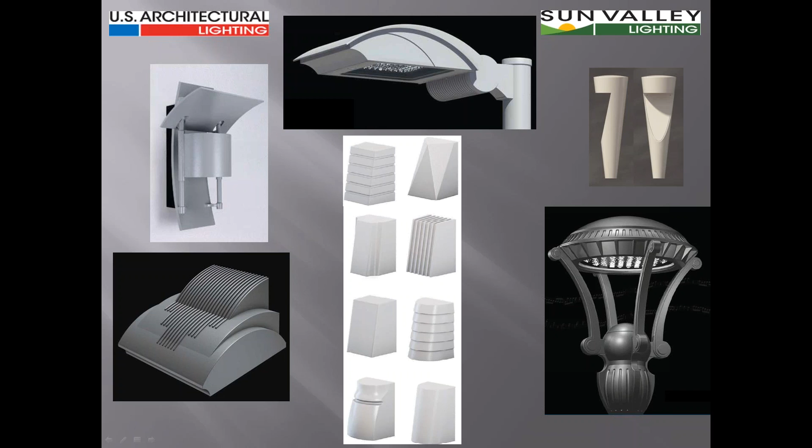That's the effort we've put into the U.S. Architectural family of products over the last few years. Bringing out products that can take advantage of the emerging technology of LED, blending them into some of the products we had existing, creating totally new ones that could help us transition from the days of HID to LED into where we are today. And certainly with the look and innovation of the products we've come out with over that period of time, unlike any other company out there. We didn't just produce an LED product, we produced an LED product that looks good getting there.

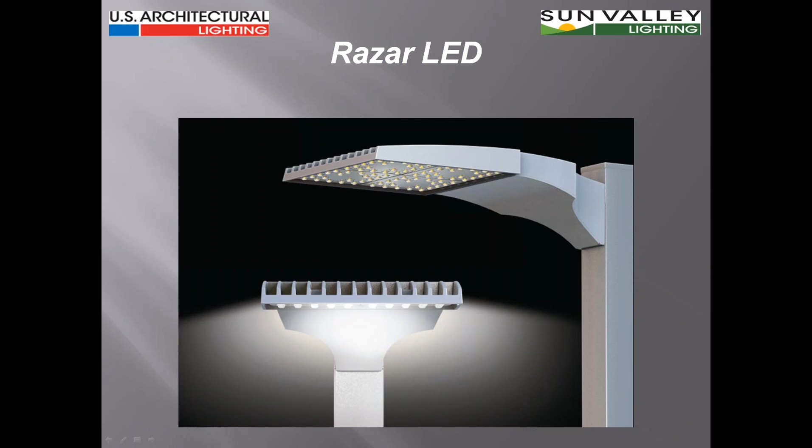The most notable of all those products in the last 2 years has been the development and presentation of the Razar LED product line. It's kind of hard to believe, but beginning in July of 2014, that's when we first introduced the Razar LED as far as the RZRM and the RZR series are concerned. That's when those products were introduced. Some people thought at that time that's where we were, not realizing where we were going down the road in the marriage of not just the technology, but also the aesthetic of the products.

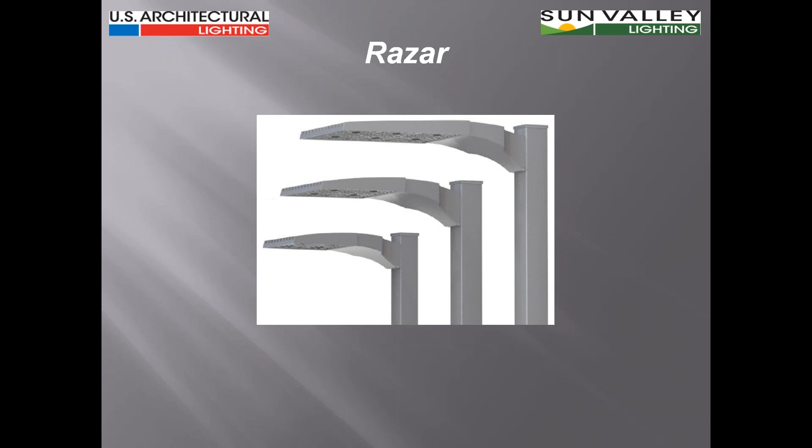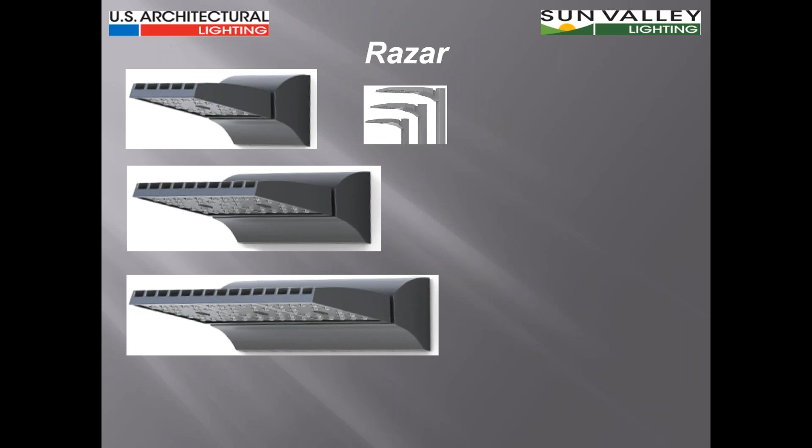Over the last 2 years, the Razar LED product line has not only grown into 3 sidearm mount fixtures, the RZRM, the RZR, and the RZRG, but it's also developed into a full line of wall mount products with 3 various sizes, retaining all of the same optical control features that the pole-mounted products have, but adding them into a fixture that looks right when mounted to the wall, and also tying into that the Razar Bollard and the single and twin-headed units.

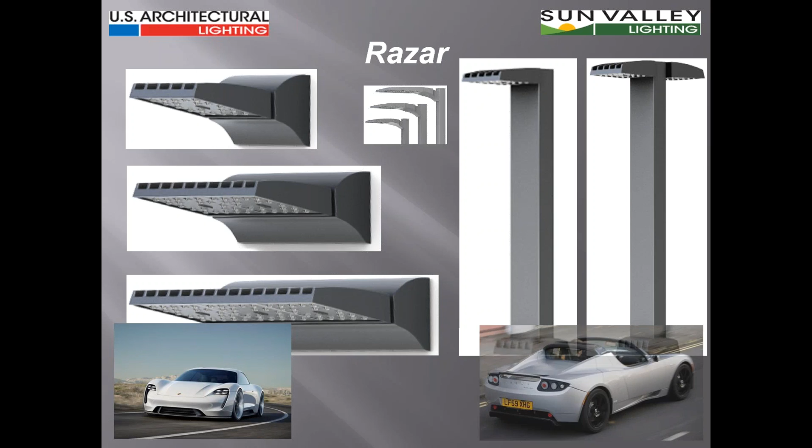The main idea here is that the marriage of technology to design becomes all-important when we're trying to promote this product in the marketplace. Up until now, most of the large manufacturers, the conglomerates, and the early adopters merely presented the technology side of it. But when we marry the technology with performance and with aesthetics, you get what makes U.S. Architectural unique in the marketplace.

Just by way of a quick review and reminder, let's take a look at a few elements within the Razar family of products. The Razar LED Generation, the small Razar, the RZRM, goes from 24 LEDs to 48, and from 350 milliamps up to 1050 milliamps of drive current, which gives us a range of anywhere from a low of 50 to a high of 250 watts of an equivalent HID product, and this is one fixture family.

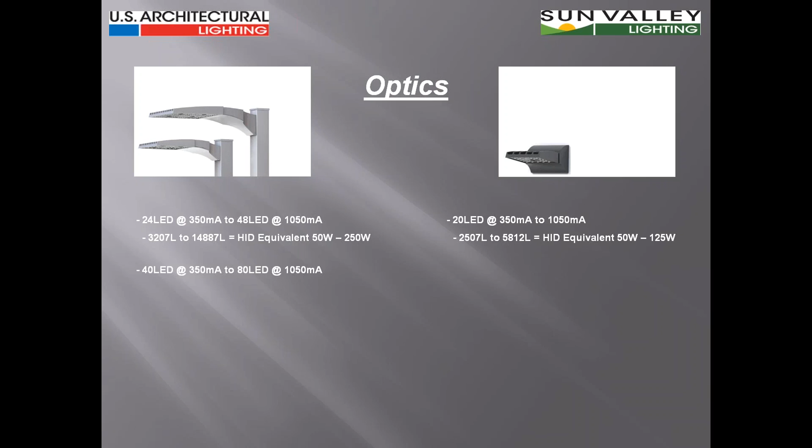It's a companion for the wall mount, approximately the equivalent of a 50 watt to 125 watt as far as the wall mount is concerned. The RZR and the WM2 versions handle the RZR, the pole mounted, from roughly 70 to 100 watt equivalent up to 450 to 575 watt. It goes from 40 LED to 80, from 350 milliamp to 1050 milliamp. In the wall mount version, the equivalent of a 100 up to 200 watt in a wall mount.

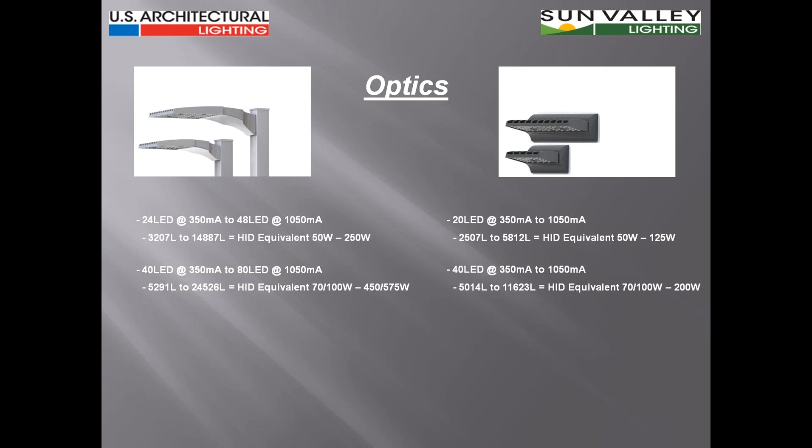And in the largest iterations in both applications, for the Razar G and also the WM3, we can go all the way up to a 1000 watt HID equivalent with the Razar G, or a 400 watt equivalent in the WM3. Just at this point alone, when you look at the marriage of the technology, the performance, and the aesthetics of it, you're already beginning to see a separation between U.S. Architectural and all other comers and companies out there.

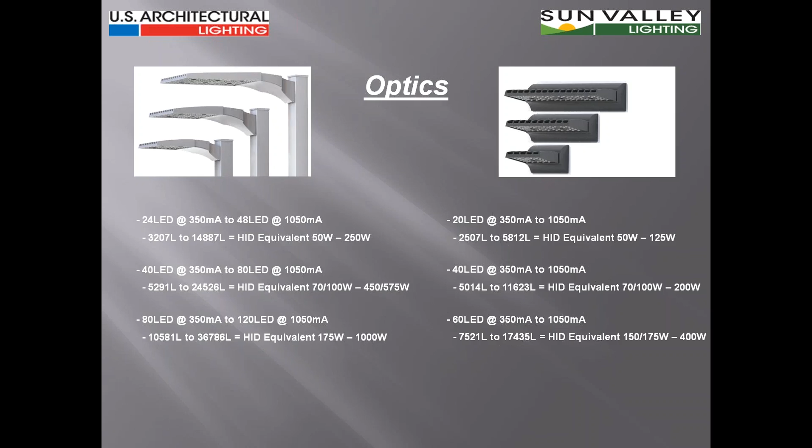Optically, we go even further than that with some things that are unique to this company, and it's the approach that we've taken in everything that we're doing when it comes to LED now. We have field replaceable optics. Field replaceable optics that are also field rotatable. You don't need to have the factory set the rotation of the optics. You can do it in the field.

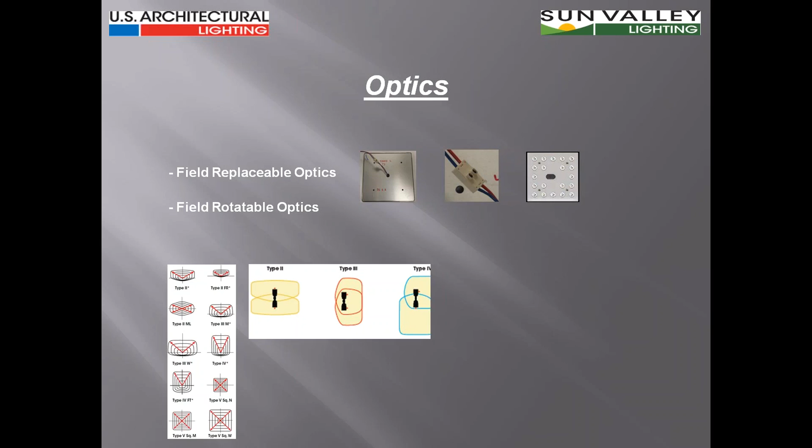We have 10 different optical patterns out of the LED system in the Razar, and in those 10 patterns, not only can they be rotated within a fixture, so that you can leave the fixture orientation in one location and rotate the patterns in a different one, but if you're using only one fixture head, because of using individual panels, you can make one fixture head perform like two fixture heads by rotating the panels in opposite directions or angular directions, so that you can make one fixture head perform like a back-to-back type 3 or a 90-degree mount side fixture. All of this type of flexibility is built inherently into the Razar package, something that no other manufacturer offers you.

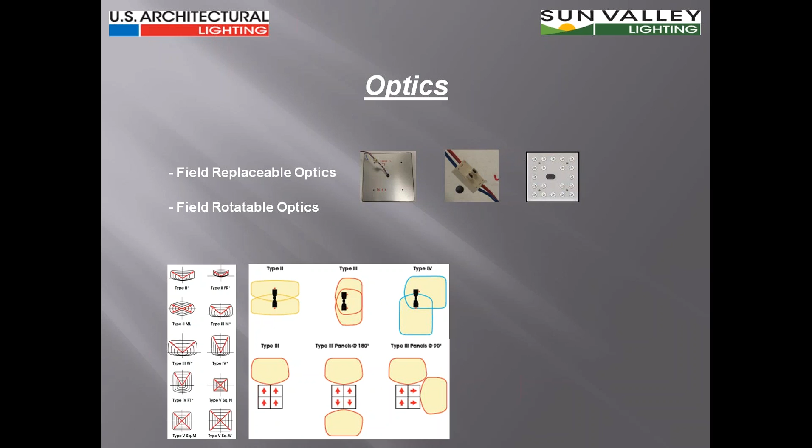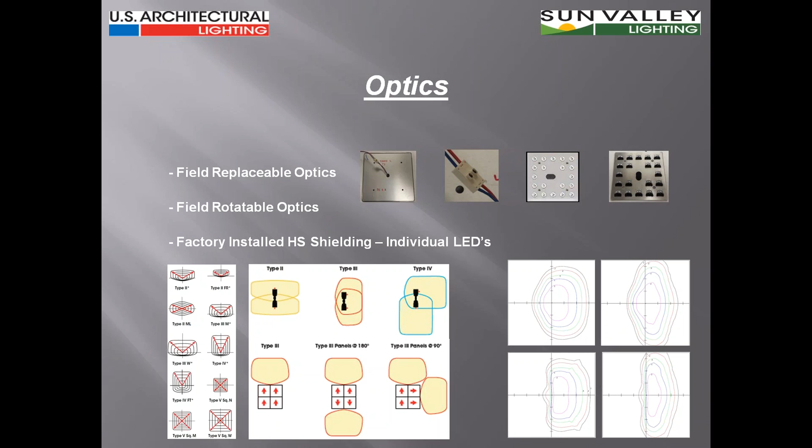Plus, we have house side shielding, and we'll install at the factory in its individual LED house side shielding, the only proper way to do that. This gives us cutoffs of less than a half a mounting height behind the fixture for a 1/10 of a foot candle in the asymmetric distributions. Performance-wise, it's as good or better than anything else on the market today. Flexibility-wise, nothing else has this type of flexibility to it.

And it's not just a matter of looking at LEDs and saying we're just going to take advantage of the LED technology itself. We've put a lot of technology into the build of the product to maximize LED performance. Thermal control is one of the most critical elements in the design of LED products. And there's huge benefits from running LEDs cooler.

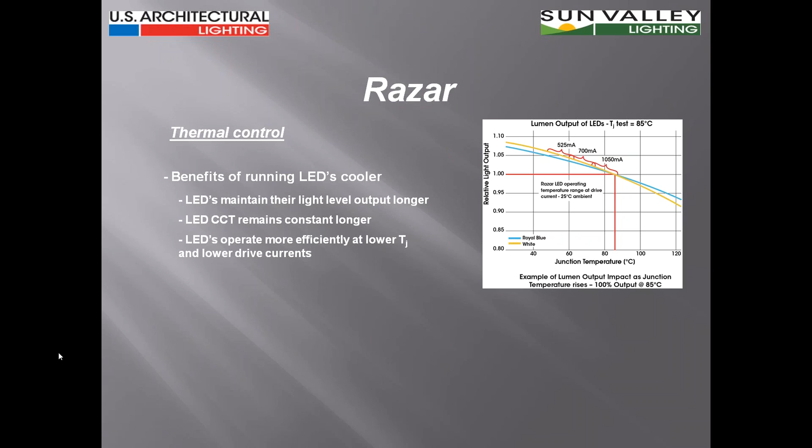For example, they maintain their light level output longer when they run cooler. And that's an emphasis that we try very hard to carry out at U.S. Architectural. If you take a look at the way LEDs perform as far as getting the color temperatures to them, it's done with phosphors. And the cooler the phosphors run, the longer they hold their color temperature, so they keep that stability. Plus, LEDs operate more efficiently at lower junction temperatures and lower drive currents.

Which is the reason that we don't just focus on offering you a 700 and 1050 milliamp unit. If we did that, then that's all we would have. But we offer you a full range from 350 milliamps to 1050 milliamps to take advantage of the efficiencies that lower drive currents and lower operating temperatures offer you.

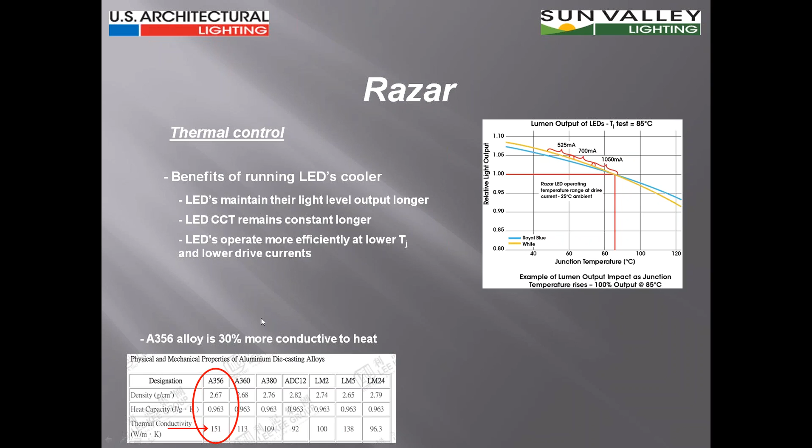And the way we get there is by using materials that are far more conductive to heat. For example, the A356 alloy that we use in the manufacture of all of our castings is more than 30% more conductive to heat than the typical die-cast alloys, the A360, that are used by all the other manufacturers. Aside from the material, we also mill those housings to give you as much flatness as possible for as much conductivity. We'd like to say perfect flatness and perfect conductivity between the optical panels and the optical assembly, thereby pulling the heat away from the components and getting maximum performance out of the luminaire.

Now that's all on the technology side, that's all on the performance side. But we're not stopping there. The application of the product, the look of the product is also important. And this is where we step into the next element of what we're doing within the Razar product family.

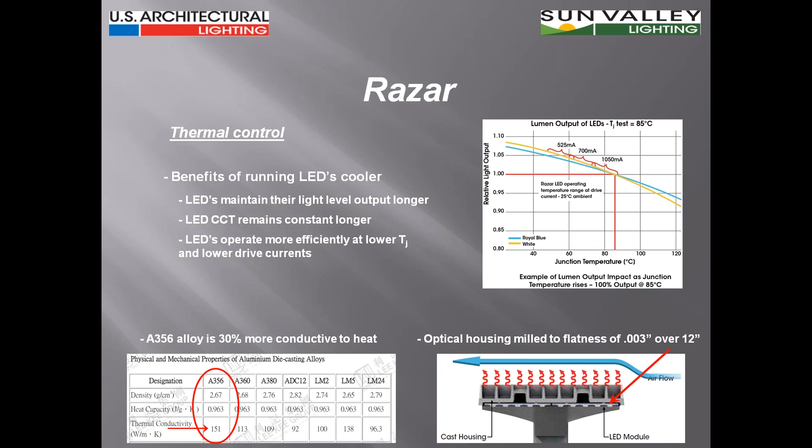We're competent in how to build it, but you also have to have as many variations on the product as possible. So by means of this presentation, we're going to be offering you something else that's new within the product family. First of all, you have a Razar mast arm fitter that applies to the RZR model, which requires a dedicated electrical compartment. It's not just a bolt-on device, it's a whole new piece to retain the look of the product while providing you with all of the mechanical features that you need.

Internally, the mast arm fitter has stepped level adjustments at 0, 1.5, and 3 degrees, and it's positive stepped adjustments. It's not done by set screws that can maybe get you there, but it's a specific set of adjustments. Plus, we're using a dual clamp arrangement as far as holding the fixture to the horizontal tenon. Again, not using set screws that can work loose over time or cause the fixture to droop over time. Tremendous advantage there.

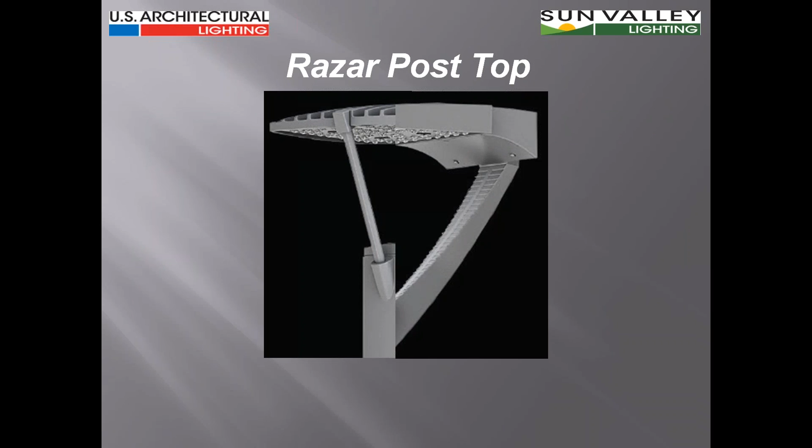But we didn't do this webinar just to show you a mast arm fitter. It's a great addition to the RZR model. There's more. There's more, and now here comes what you were waiting for. Now, when we sent you out the invitation, we let you see what we would be presenting. The new Razar post tops, a whole new post top, a whole new classification of product.

This is the image we sent you, and we've had a lot of people that have called up and said, boy, that's a good-looking fixture. The king has new clothes. Boy, are you sure that's going to sell?

That's interesting. What I want you to do is stare at that fixture. I want you to look at it. And as you look at it, tell me what you see, because something interesting happens to it as you concentrate on the appearance of that fixture.

Yeah, it's 2 fixtures in one. I only had one picture to be able to show you, so I put the 2 fixtures together in one picture, and everybody thought I was crazy. We're introducing now 2 new Razar post-top luminaires, the twin-arm version that you see here on the left, the single-arm version you see on the right. Naturally, they'll be named the PT2 and the PT1.

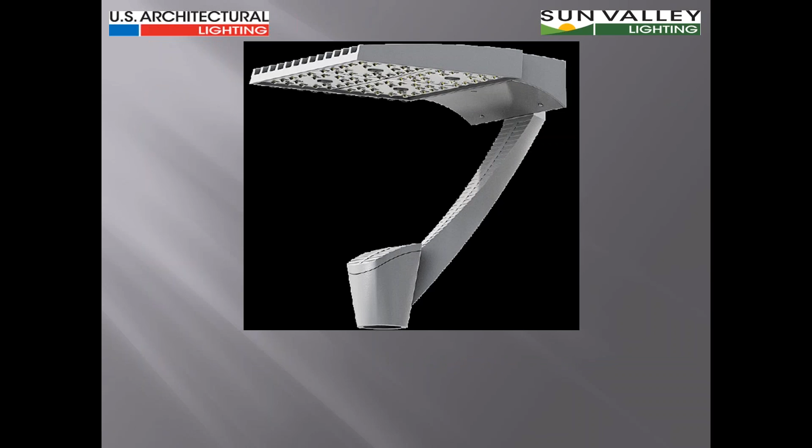Taking a look at the fixture for a moment, let's not go into some of the other mechanical elements or some of the other features, but let's just gaze on the aesthetics of the product. As we talked about, the marriage of technology, performance, and most importantly, design is critical today in today's market. We're leading on that edge.

Think about the lines you represent now from any of your conglomerates. Go back to Hubbell for you Hubbell agents, or Eaton for you Eaton agents, or Acuity for you Acuity agents, or even Cree or you independents. How many other manufacturers have the breadth of offerings in their product families that you're seeing here now, and the aesthetics to tie into it?

Now, the PT1 version is interesting. The fixture itself, the fixture head, looks a lot like the Razar RZR models or any of the other sizes. This is based on the RZR model itself. The real key to it is in the arm that holds it up there. Not only being a single arm, but the design of the arm.

It's rather interesting. If you look at the bottom of the arm, where it mounts to the tenon slip fitter, it's a triangle with the apex facing inward, the base facing outward. When you transition to the top of the arm, the apex is facing outward and the base is facing inward. So it lends to a very interesting approach as far as the look is concerned.

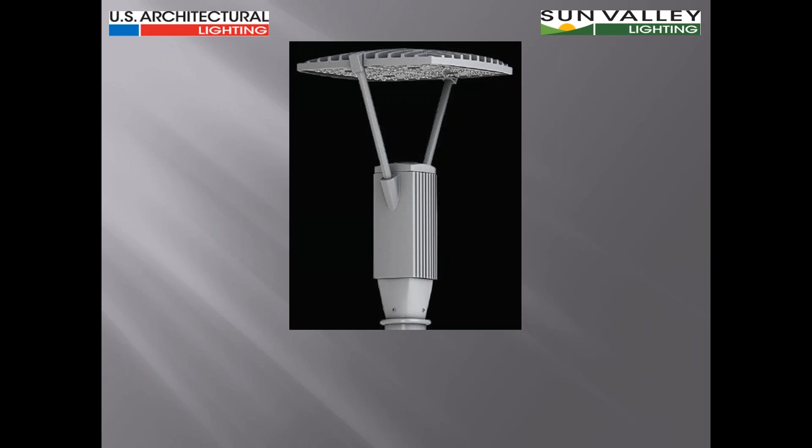The PT2, completely different in its appearance. Something that's a little more traditional, if you will, for a contemporary fixture, using a twin-arm assembly to hold the optical assembly up high away from the rest of the luminaire. All of the electronics, except for the LEDs themselves, are down in the hub. The driver's down in the hub, or any of the other control devices are down there. So we get the heat away from those components and, again, get maximum performance out of the LEDs.

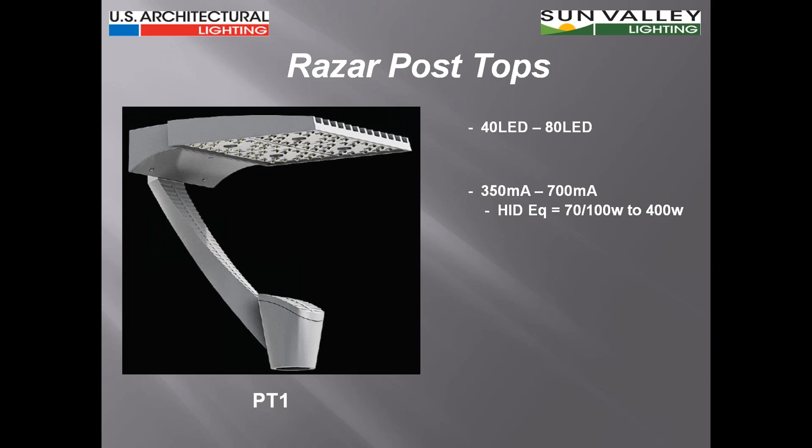Again, retaining all of the rotatability and replaceability in the fixtures that we've seen up till now that comprise the Razar family. The Razar post tops, the PT1, again, are based on the RZR model. So they're a 40 or 80 LED configuration running from 350 milliamp to 700 milliamp in your selections. That gives you the equivalent HID output in these luminaires of anything from around 70, 100 watts up to 400 watts. And there's 10 optical distributions available for both models, field rotatable or field replaceable.

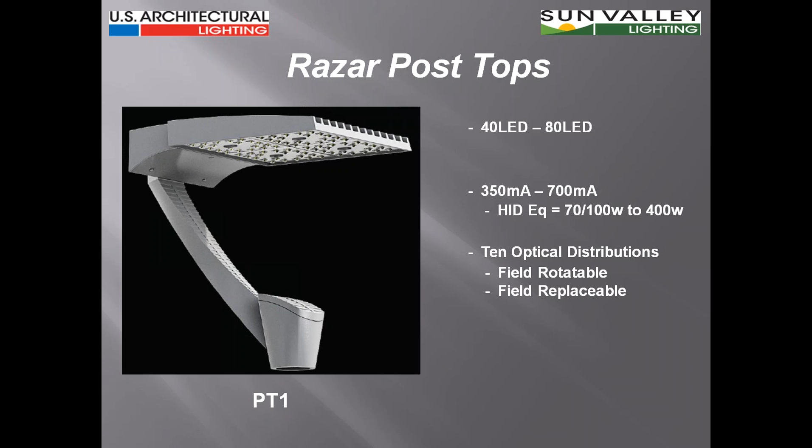And again, no difference between either the PT1 or the PT2 with all of these common features or elements that are available there.

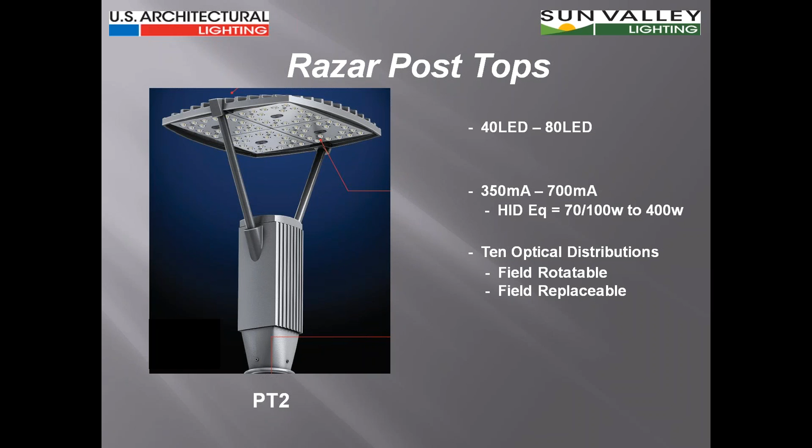The new catalog coming out with the Razar is based on the old catalog, but it adds a number of visual elements showing new features. We've added some pages to it.

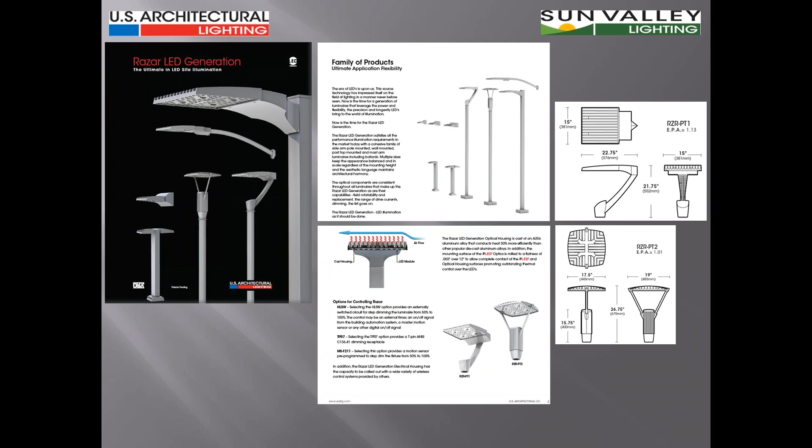Internally, when you see the family of products in the entire array, you begin to appreciate just how much there is to the Razar LED generation overall. I want to reiterate that the products you have available from other companies, especially the conglomerates, always focus on what they figure will be the highest volume elements, not looking at all the other items that comprise an entire family for your specifier to do an entire job with. When you look at what we do as a dedicated outdoor lighting manufacturer, you get all of the tools necessary with any of the product families, particularly the Razar product family.

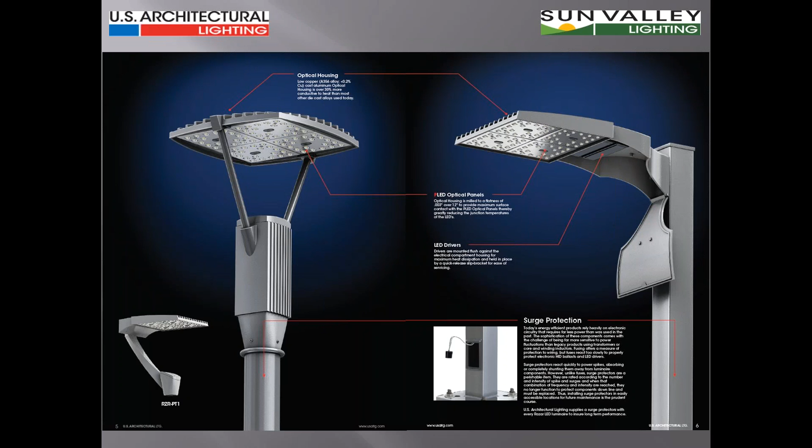The center section in the new catalog gives you an outstanding representation of the sidearm mount and both post-top mounts, where you can see the real connection between the families describing the various elements and features of the product family. There's a luminaire style and size for every pole-mounted application when you go through the entire Razar family, from 10 to 12 feet with the mini Razar, even some post tops, up to the RZR models, all the way up to the Razar G. In its largest iterations, we can cover every mounting height from 10 feet up to 45, even 50 feet if that's what you desire because of the illumination possibilities.

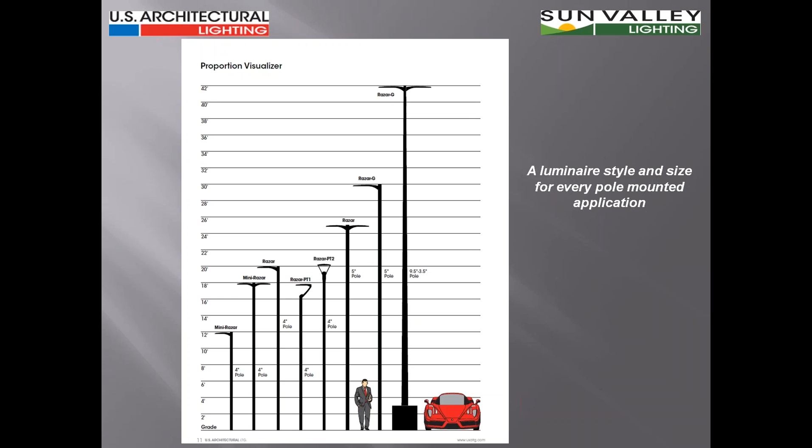Bear in mind we're talking about the marriage of technology, performance, and aesthetics all within one product family here. Maybe it does good to forget about that catalog cover with the copy on it and just take a measure of the overall look of the product line. You don't see this type of offering from any other company or manufacturer out there other than U.S. Architectural Lighting.

Taking a look at this whole presentation with the Razar LED generation, starting with the mast arm fitter that applies to the RZR model, which hasn't really changed much in the way of optics. But then you take a look at the whole breadth of the family, and the Razar LED generation now offers 3 sizes of sidearm mount, 1 mast arm mount fixture, with HID equivalents ranging from 50 watts to 1,000 watts, 10 distributions that are all field replaceable and rotatable. The mast arm fitter mechanics are common to those who work in the roadway field, very similar to what's seen in a lot of Cobra head style mechanics, not using just a slip fitter with set screws, but using the positive locking elements the industry has desired for all these years.

3 sizes of wall mount luminaires with an HID equivalent ranging from 50 watt to 400 watts, 7 distributions, all asymmetric distributions, all field rotatable and field replaceable.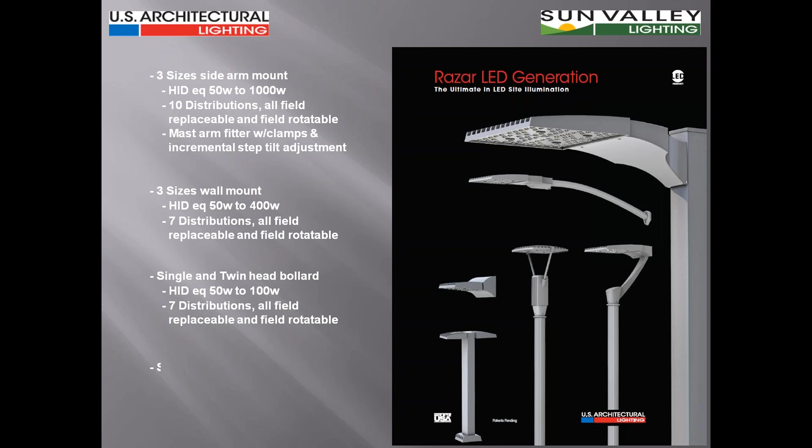And now, especially with the single and twin arm post-top mounts, covering an HID equivalent of 50 to 400 watts, again 10 different distributions, all field replaceable and field rotatable, all the same features we see in the rest of the Razar family. What other product, product family, or company do you have in your repertoire of lines that even comes close to offering this type of flexibility and this sense of technology, performance, and aesthetics?